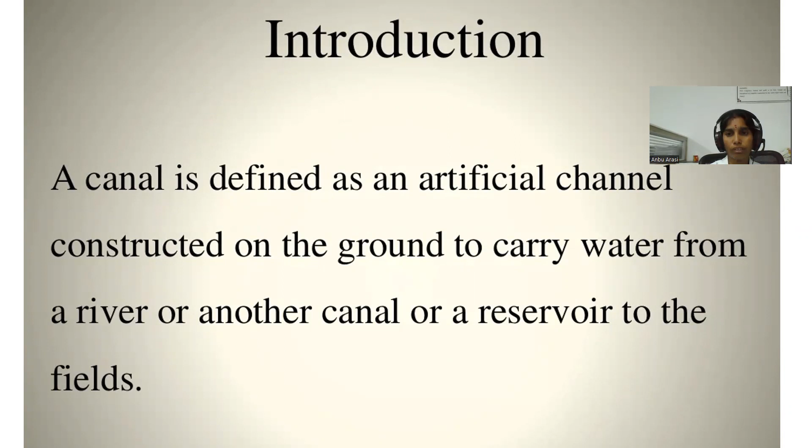A canal is defined as an artificial channel constructed on the ground to carry water from a river, another canal, or a reservoir to the field. Types of canal.

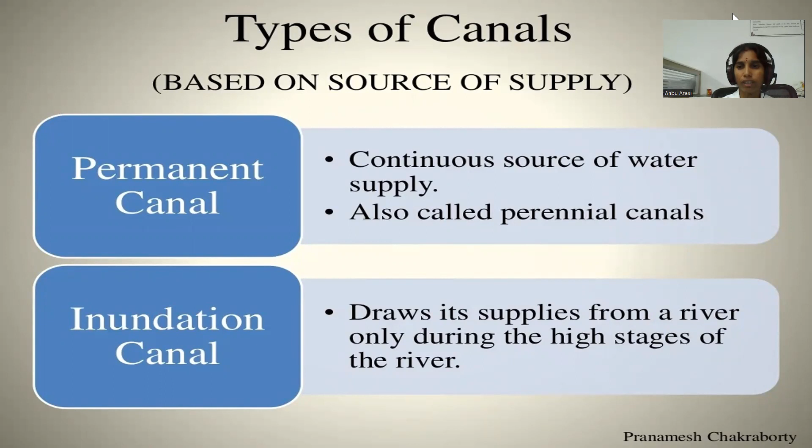Canals are classified based on source of supply into two types: permanent canal and inundation canal. A permanent canal has continuous sources of water supply, also called perennial canal. An inundation canal draws its supplies from a river only during the high stages of the river.

Based on function, canals are classified into irrigation canal, navigation canal, power canal, and feeder canal. Irrigation canal carries water from its source to agricultural fields. Navigation canal is used for transport of goods.

The canal which is constructed for the purpose of inland navigation is known as navigation canal. This type of canal is also utilized for irrigation. For example, Ganga-Brahmaputra navigation cum irrigation canal, and power canal.

The canal which is constructed to supply water with very high force to the hydroelectric power station for the purpose of moving turbines to generate electric power is known as power canal or hydel canal. For example, Nangal hydel canal. Then there's feeder canal.

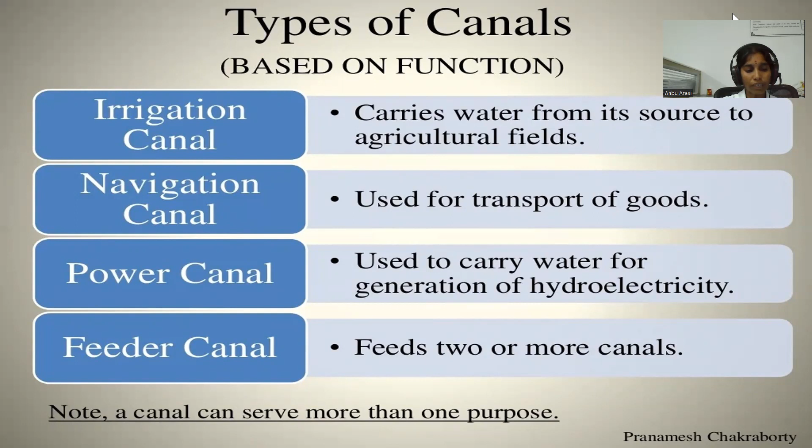The canal which is constructed to feed another canal or river for the purpose of irrigation or navigation is known as feeder canal. Example: Farakka Barrage feeder canal.

Types of canal based on alignment: watershed canal or ridge canal, and contour canal or side slope canal.

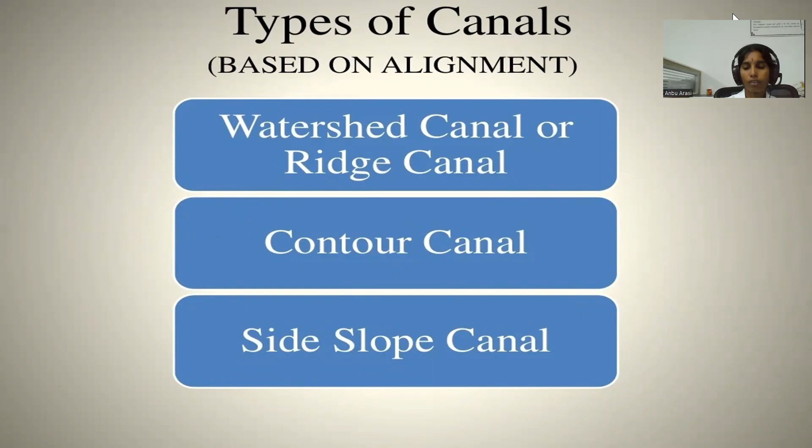Watershed canal or ridge canal. The canal which is aligned approximately parallel to the contour line is known as contour canal. This can irrigate the areas on one side only. This canal may cross natural drainage and hence cross drainage works are necessary.

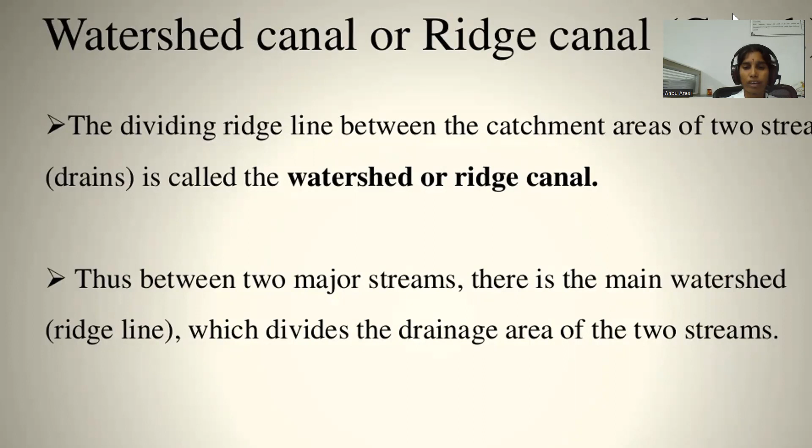The dividing ridge line between the catchment areas of two streams is called watershed or ridge. Thus, between two major streams, there is the main watershed which divides the drainage area of the two streams. The canal which is aligned along any natural watershed is called a watershed canal or ridge canal.

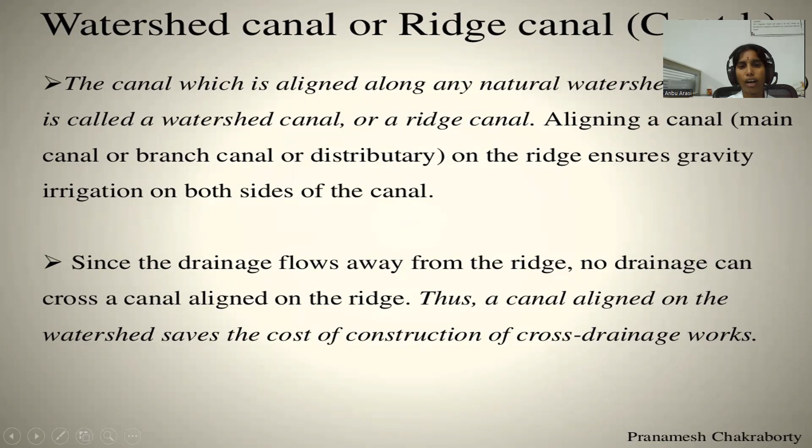Aligning a canal on the ridge ensures gravity irrigation on both sides of the canal. Since drainage flows away from the ridge, no drainage can cross a canal aligned on the ridge. Thus, the canal aligned on the ridge watershed saves the cost of construction of cross drainage works.

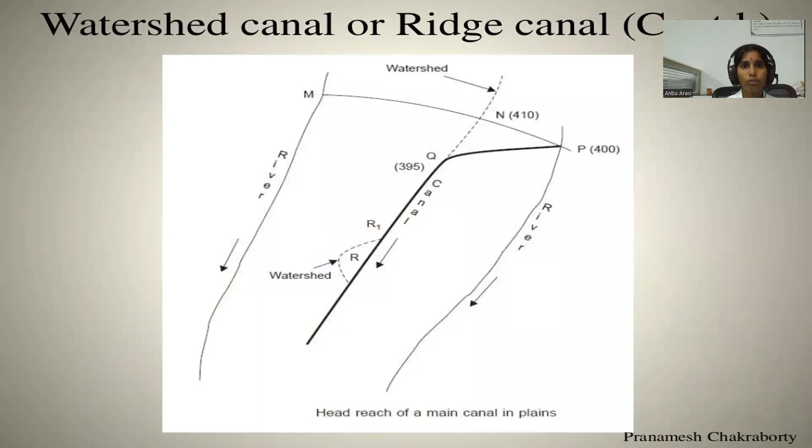Watershed canal along the ridge line is not found economical in hill areas. In hills, the river flows in the valley well below the watershed. In fact, the ridge line may be hundreds of meters above the river. It therefore becomes virtually impossible to take the canal on top of such a higher ridge line.

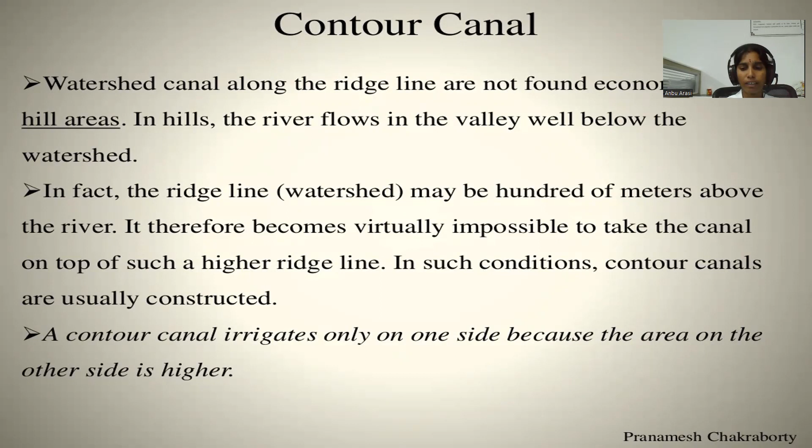Next, side slope canal: the canal which is aligned approximately at right angles to the contour line is known as side slope canal. It can irrigate the area on one side only. Again, it does not cross any natural drainage, so cross drainage works are not necessary.

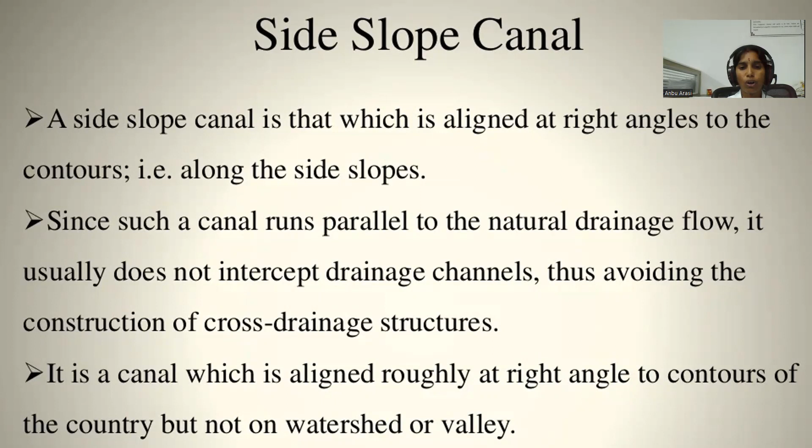Types of canals based on discharge: classified into main canal, branch canal, and distributary canal. Distributary canal is also divided into major distributary and minor distributary, and finally watercourse or field channels.

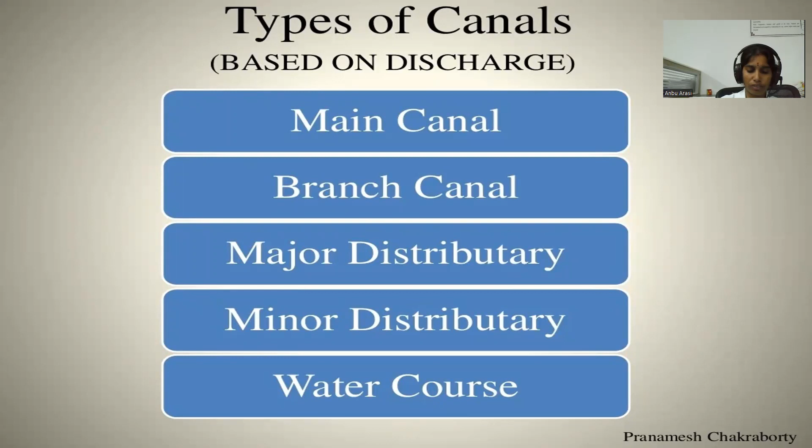Main canal: the large canal which is taken directly from the diversion headworks or from a storage reservoir to supply water to the network of other small canals is known as main canal. The irrigation water is not directly supplied to the field from the main canal.

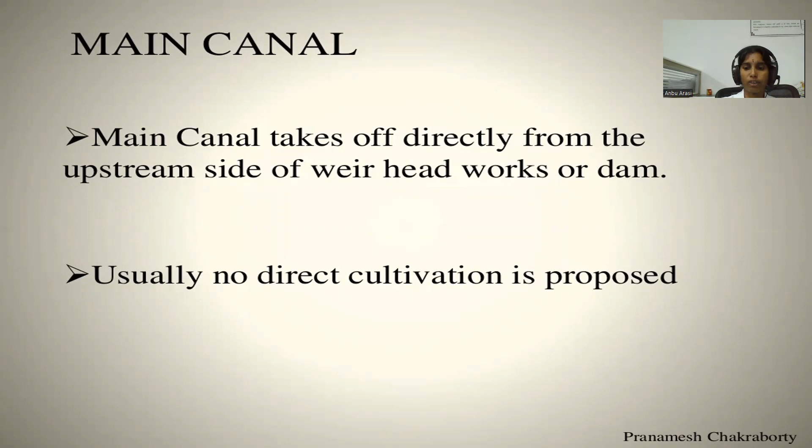The water is taken to the field through the branch canal, distributary canal, and field canal. The main canal is the backbone of the canal system. It takes off directly from the upstream side of the weir headworks or dam. Usually, no direct cultivation is proposed from the main canal. This is the main canal.

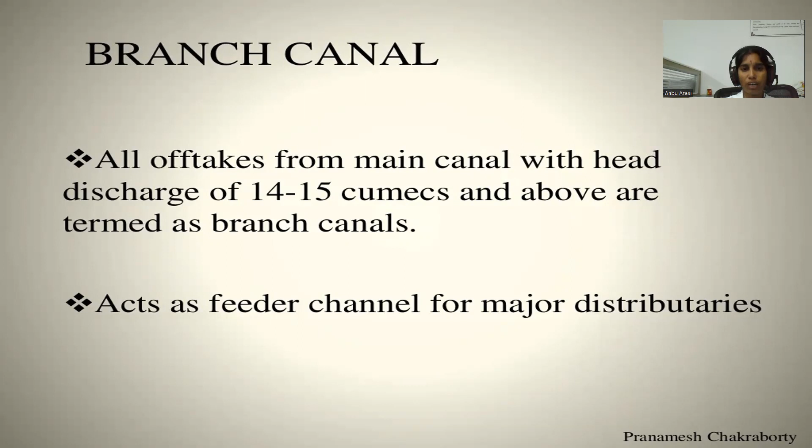Branch canal: branch canals are taken from either side of the main canal at suitable points so that the whole command area can be covered by the network. The discharge capacity of the branch canal is smaller than that of the main canal, varying from 5 to 10 cubic meters per second. All offtakes from the main canal with a discharge of 14 to 15 cumecs and above are termed branch canals, and they act as feeder canals for major distributaries. This is the branch canal.

Next, major distributary canal. The distributary canals are taken from the branch canals to supply water to different sectors. The discharge capacity of these channels varies from 0.25 to 3 cubic meters. These are designed as major distributary and minor distributary according to their function in the total network. Major distributary canal offtakes from the main canal or branch canal with a discharge from 0.25 to 15 cumecs are termed major distributaries.

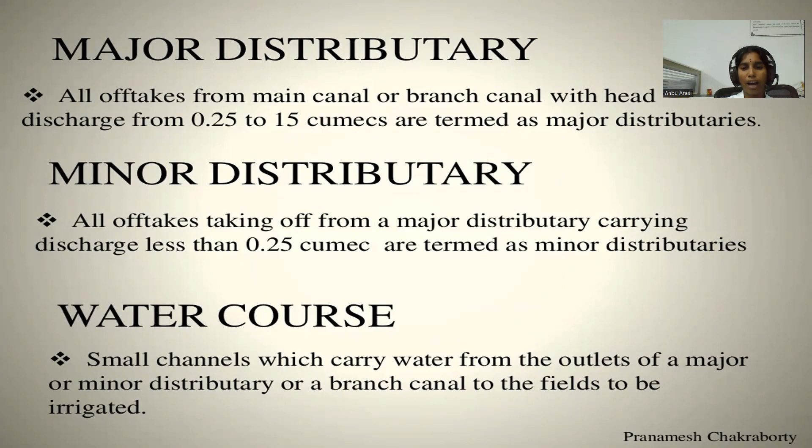Minor distributary: all offtakes from a major distributary carrying discharge less than 0.25 cumec are termed minor distributaries. Watercourse or field channels are taken from the outlet of the distributary channels by the cultivators to supply water to their own lands. These channels are maintained by the land cultivators themselves. They are small channels which carry water from the outlets of a major or minor distributary or a branch canal to the fields to be irrigated. This is the major network of branches of canals.

The center is the main canal. Again, the main canal is divided into minor distributary canal and major distributary canal. This is the branch canal. The main canal divides into branch canals, and branch canals are again divided into minor distributaries and major distributaries.

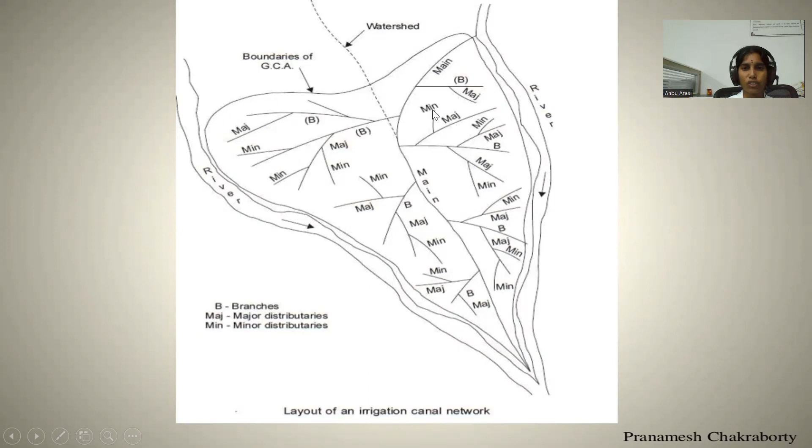Next, types of canals, divided based on lining provided or not: unlined canal and lined canal. Unlined canal has bed and banks made up of natural soil; water velocities higher than 0.7 meter per second are not tolerable. There is high seepage and conveyance water loss, and profuse growth of aquatic weeds retards the flow.

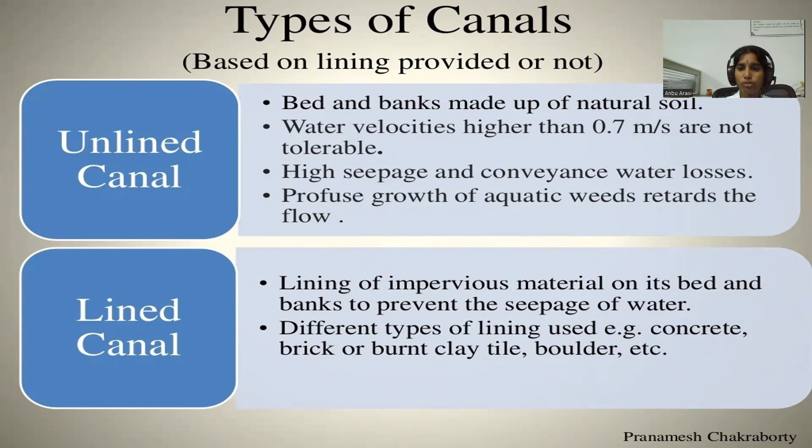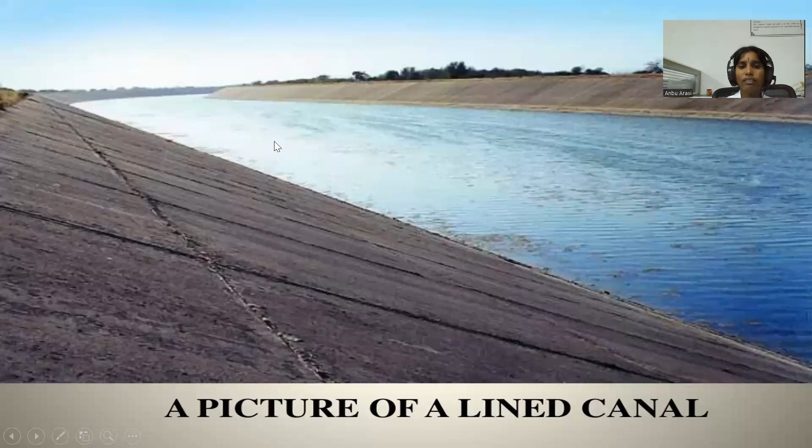When the NSL is above the top of the bank, the entire canal section will have to be in cutting, and it shall be called canal in cutting. Similarly, when the NSL is lower than the bed level of the canal, the entire canal section will have to be built in filling, and it is called canal in filling.

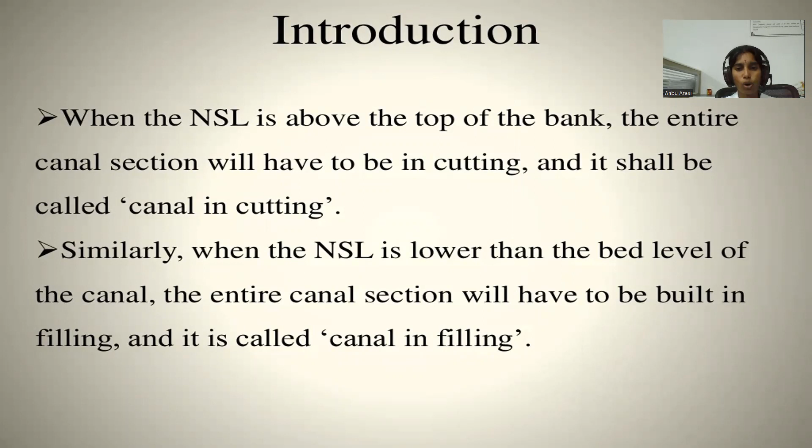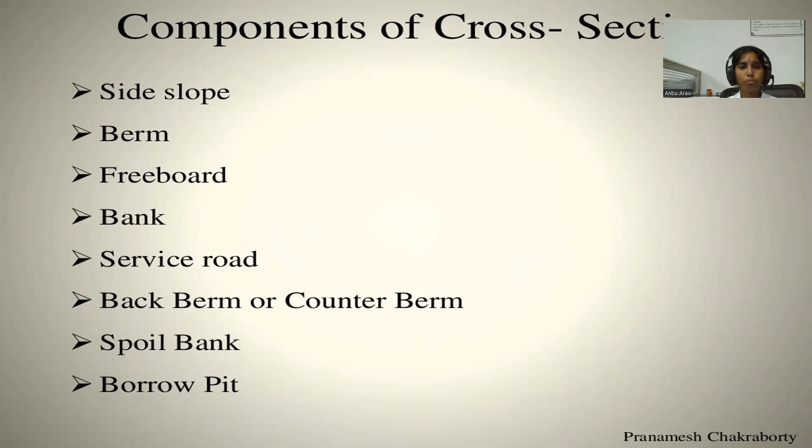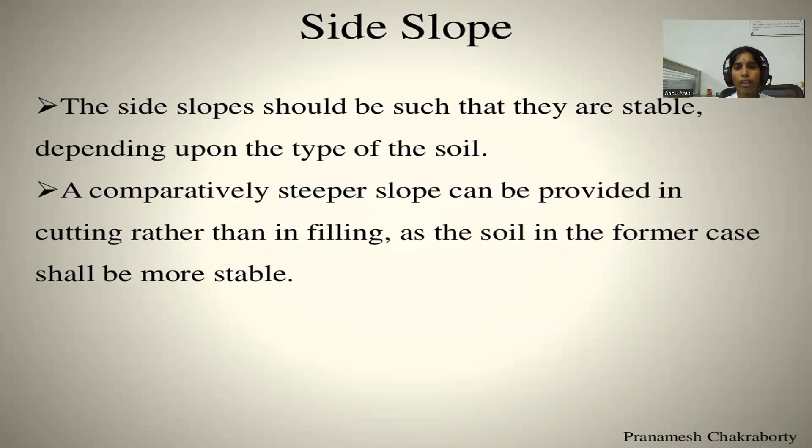Components of cross section: side slope, berm, freeboard, bank, service road, back berm or counter berm, spoil bank, borrow pit. Side slope: the side slope should be such that it is stable depending upon the type of soil. A comparatively steeper slope can be provided in cutting rather than in filling, as the soil in the former case shall be more stable.

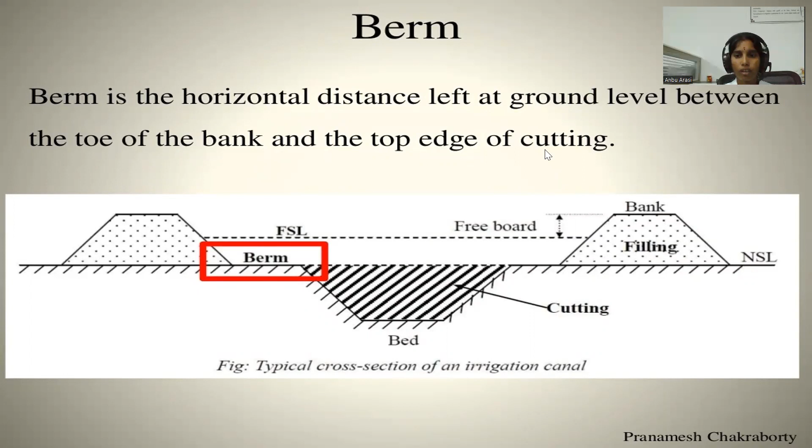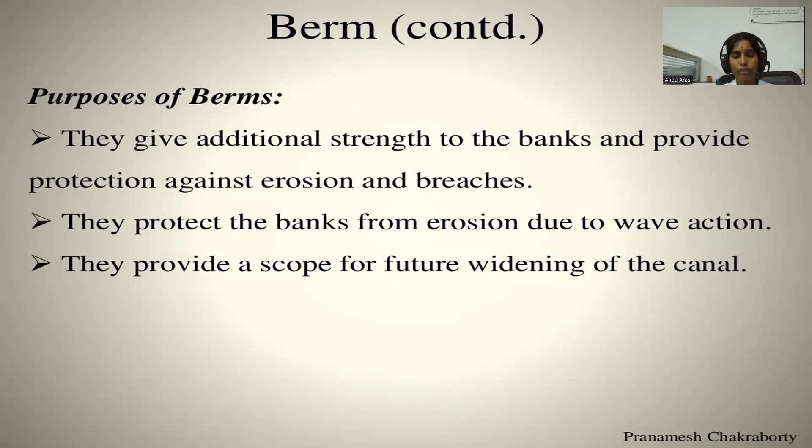Berm: berm is the horizontal distance left at ground level between the toe of the bank and the top edge of cutting. This portion is called berm. Purpose of berms: they give additional strength to the bank and provide protection against erosion and breaches. They protect the bank from erosion due to wave action, and they provide scope for future widening of the canal.

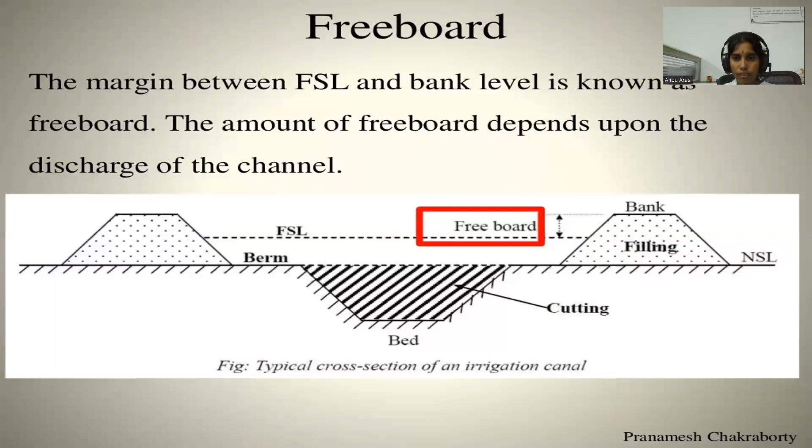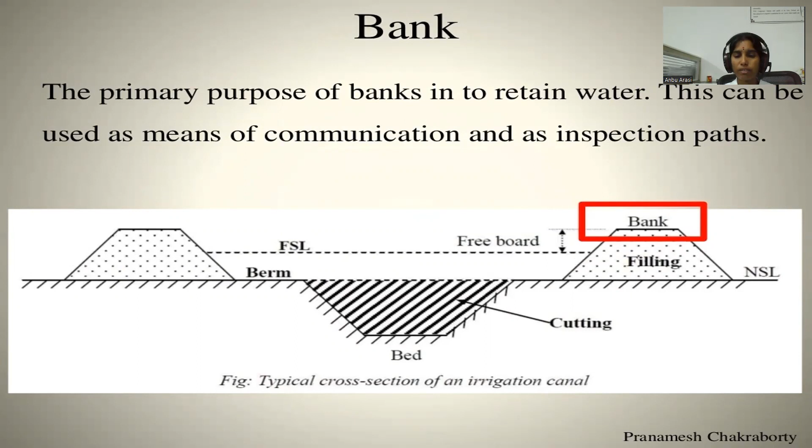Freeboard: the margin between FSL and bank level is known as freeboard. The amount of freeboard depends upon the discharge of the channel. This portion is known as freeboard. Bank: the primary purpose of banks is to retain water; this can also be used as a means of communication and as inspection paths. Service road: service roads are provided on canals for inspection purposes, and simultaneously serve as a means of communication in remote areas.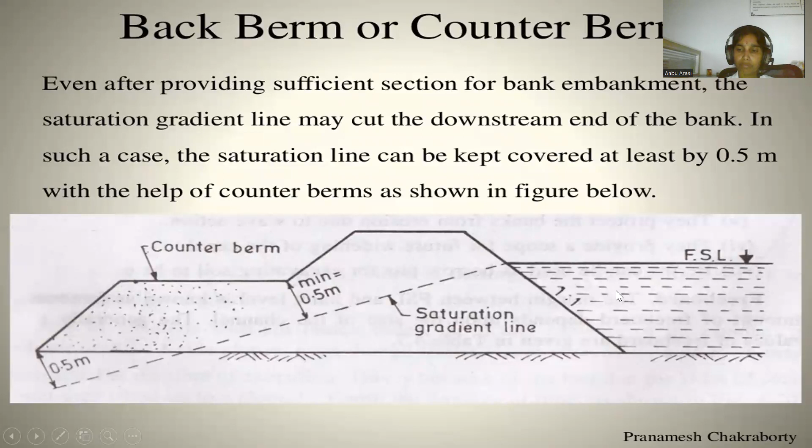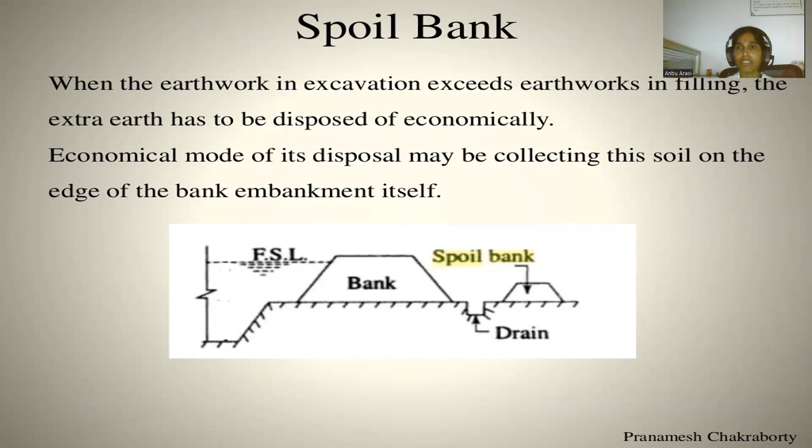Spoil bank: when the earthwork in excavation exceeds earthwork in filling, the extra earth has to be disposed of economically. An economical mode of disposal may be collecting the soil on the edge of the bank embankment itself.

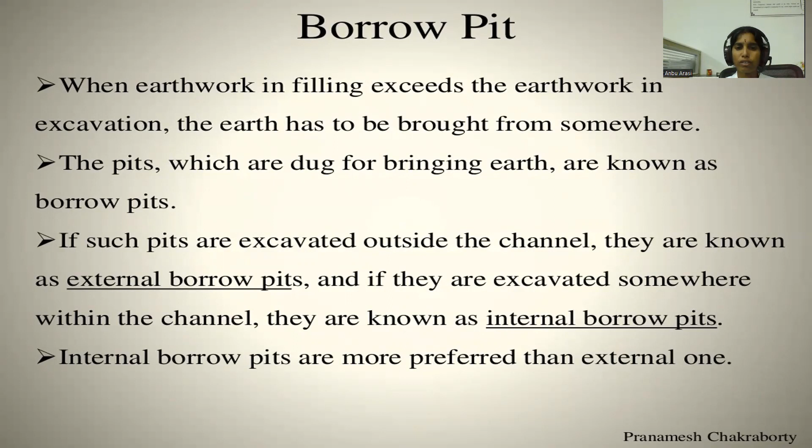Borrow pit: when earthwork in filling exceeds earthwork in excavation, the earth has to be brought from somewhere. The pits which are dug for bringing earth are known as borrow pits. If such pits are excavated outside the channel, they are known as external borrow pits; if excavated within the channel, they are known as internal borrow pits. Internal borrow pits are more preferred than external ones. This is the borrow pit.

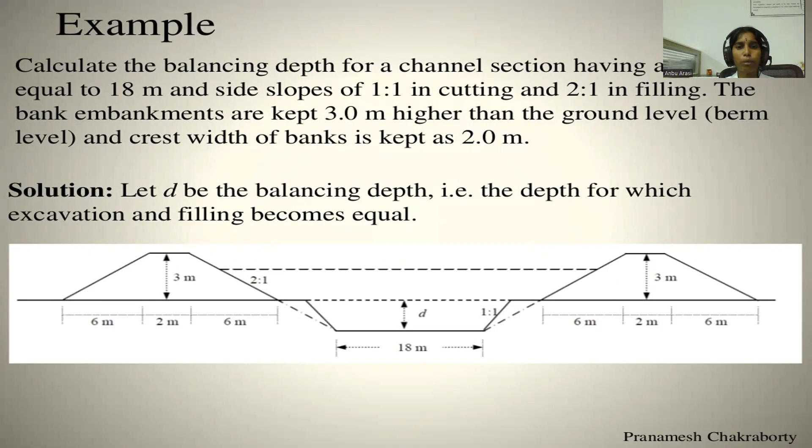This is an example of the balancing depth: the depth of the balancing cutting for which excavation and filling become equal. This is another example.

In the next class, we will see losses of water in canals. Thank you.